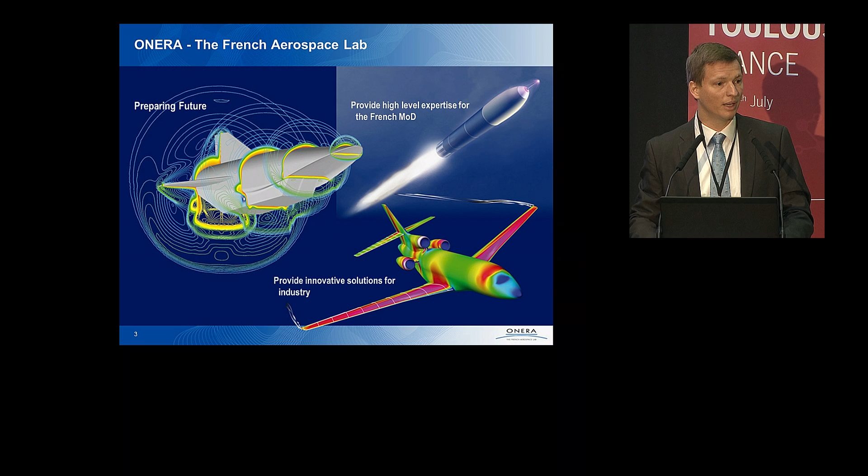So a very quick word about ONERA. ONERA is the French public research lab for the domains of aeronautics, space, and defense. Our mission is threefold: we want to prepare the future science and technologies, we have to innovate to the final benefit of the industry, and finally we have a mission to offer a high-level expertise for the French state.

This being said, let me dig into my topic today, cooperation for heterogeneous robots. I'm going to be somehow fast because I believe we are a little bit late, but I'm going to give you an overview of this topic, and I think my colleagues after me will build on other aspects of this very big topic. I'm going to first introduce this topic by mentioning some kinds of applications that you can find.

There are many of them, but I'm just going to give you a glimpse, and then give you ideas about some of the main technical challenges one is facing when dealing with actual cooperation between different kinds of robots. Since I believe you, the audience, are quite diverse in terms of knowledge with respect to the domain, I'm going to give you some glimpses or ideas about this. No equation in this. Okay.

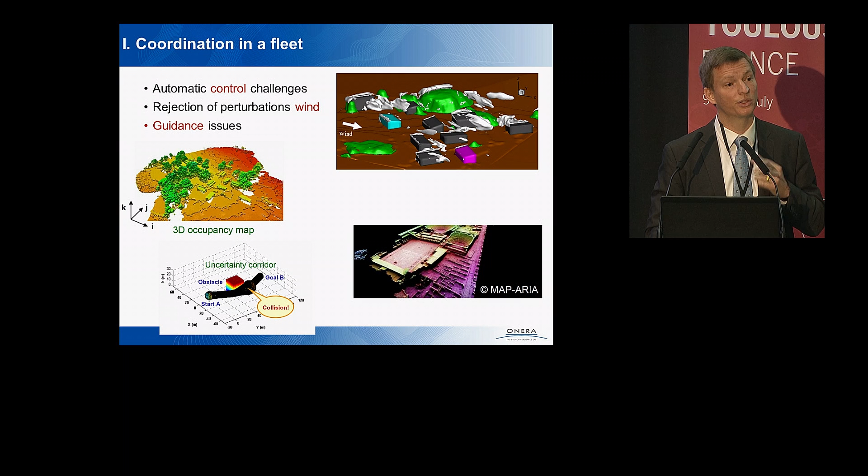But you want also to take into account some things like maybe the GPS localization will not be so good because I will be inside a building or next to a building. So we're able to say, when I reach this place, my localization will be less good, so I will take more safe margin with respect to this building because I know I will not be very accurate in my positioning there. So you have these kinds of issues.

Another issue when you want to do coordination, you want to have this fleet of, for instance, flying robots, flying all together. You have relative positioning issues. How do you know your position and how do you know the positions of the other robots in the fleet? Do they cooperate by sending you a position, and what is the accuracy of this position?

And then you have also other questions like how do you manage the shape of the formation? Do you want to have a master, one of the robots, which is a leader, and the others are slaves, they just follow it? But in this case, if the master has a problem, what do we do? How do we decide which one will become the next master and so on?

So for instance, an idea that my colleague had for that is to use a virtual leader, which is not an actual robot, but which is, let's say, the average of the position, and this one will be controlled, so that even if we lose any of the drones, there is no problem. The virtual leader still exists. And everybody is positioning itself with respect to this virtual leader.

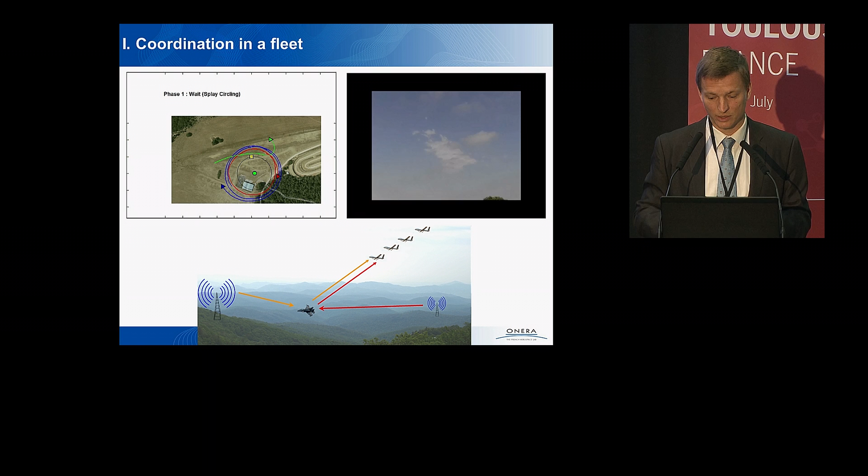So this is just a small video to show you an example of one of the applications we worked on. We are actually working on now, which is a cooperation of flying robots with spread radars to detect other flying objects. And this is a very challenging and very nice application case where you have all these drones flying all together to detect, by cooperating with each other, other flying traffic.

For instance, your UAV, your drone, does not have any more measurements of its speed. Are we able, by computations and by the help of other sensors, to recover this missing information? So we're working on that.

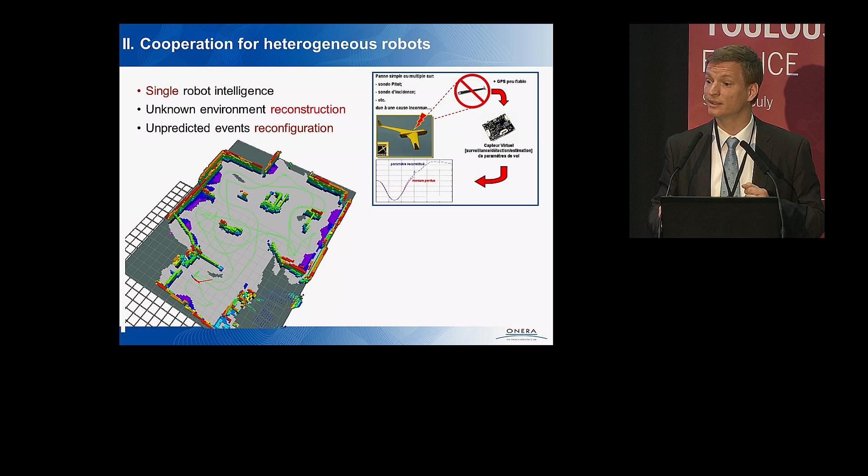Then the next step is the collective intelligence capability. This is a short video of an experiment we made with, I think, 8 robots, ground and flying, and we even introduced virtual robots. We had actual physical robots, ground and flying, but we had also virtual ones, which did not exist, but only in the computers. So we mixed real and virtual ones.

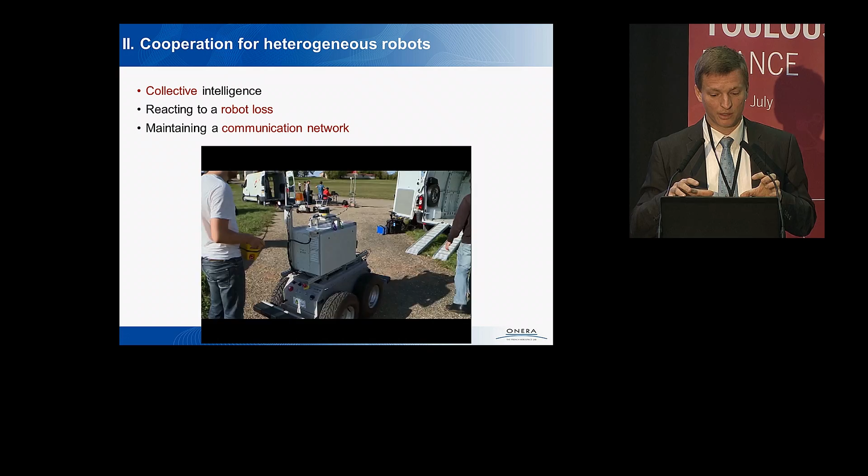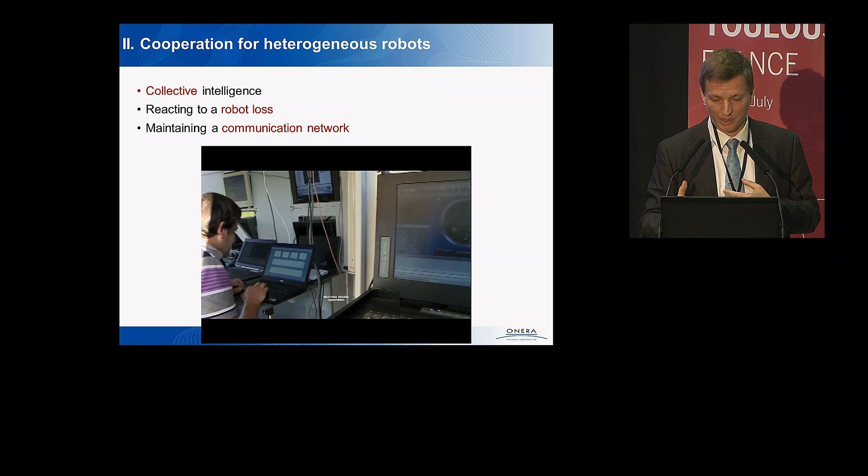And the important thing is we gave each of these robots first an individual intelligence capability, as I explained before, but then also a collective intelligence, algorithms, software, and capability. And each robot has the capability to define the mission for the whole fleet, based on what it knows about the positions and capabilities of each of the robots in the fleet, so that we are, in particular, able to face the loss of some of the robots.

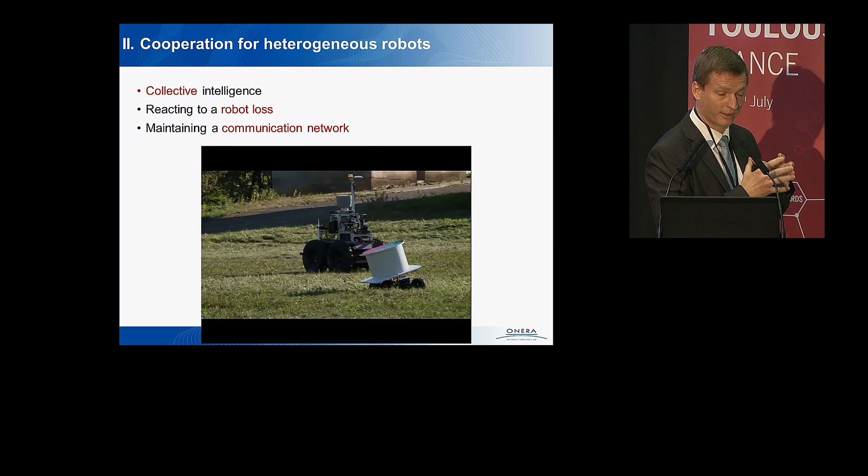So we simulated one of the drones being killed, and the rest of the fleet is able either to call for a spare, this is the easy way, or to reallocate the global mission objective into subtasks for each of the remaining robots. So we are able to face unpredicted events not only at the individual level, but also at the fleet level, and this is a very important task to do.

Another important thing is the communication between the different robots. If you are exploring a village, you may face communication problems between the different robots. So there are different ways to deal with that, and it's a big and complex problem. But one thing is you can add to the collective goal of the fleet an objective to maintain the communication network between them.

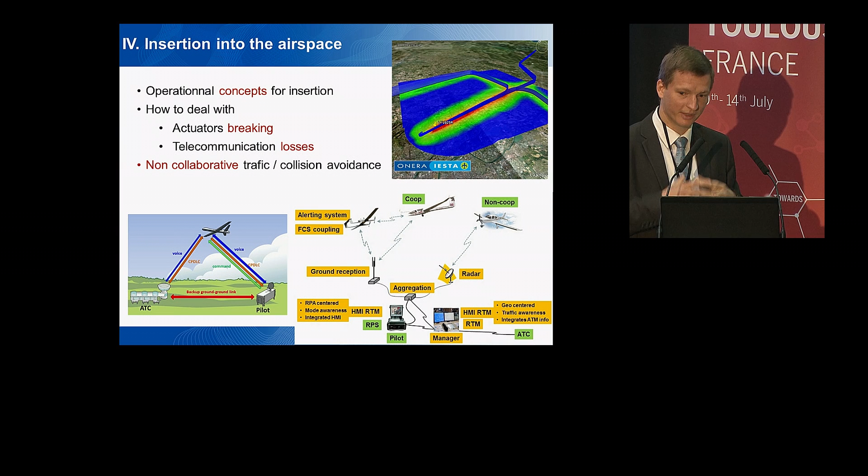Another topic dealing with flying robots is, as I mentioned briefly before, the insertion into the airspace. You have so many flying things today in the air, and with the multiplication of drones, you may have much more. So we need to make new operational concepts to insert them inside this airspace and to take care of issues like actuator breaking. I was talking about that before. When a drone is facing a problem, you want, for instance, to make a bubble around it and to forbid any other aircraft from getting inside this bubble.

But then you want to see if this operational concept is possible. Meaning, if you have so many aircraft in the air, is it possible to save a bubble and say nobody flies in there? Is it doable in terms of the size of the traffic? So this is a kind of question that needs to be asked.

Finally, also a very important topic that I believe my colleagues will dig into much more, the human-machine interaction. And I want to share only one thing with you about that, the supervision by one human being of an autonomous system. You know that the human brain is fantastic, of course. It has a lot of capabilities, but it also has some particular flaws that we need to know and understand so as to design very dedicated and efficient interfaces between the human and the robots.

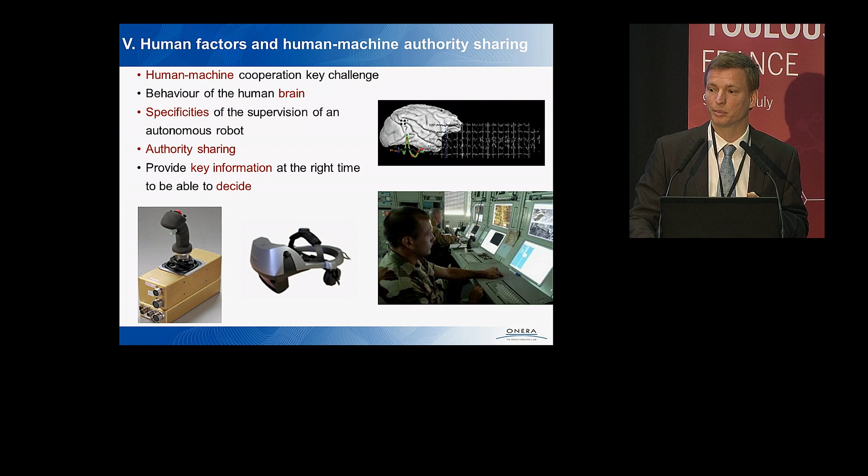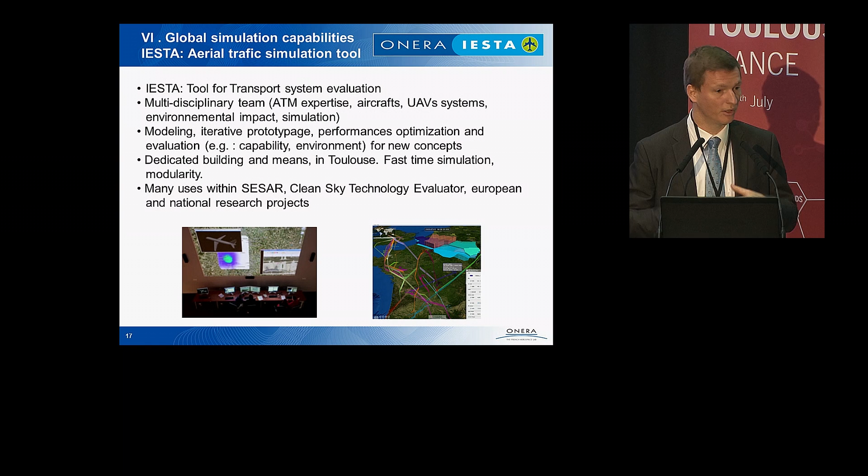And finally, when dealing with all these aspects related to cooperation between different kinds of robots, you always need very efficient simulation capabilities. Of course, everybody is doing simulation, but here I'm talking about very refined simulation capabilities where you are able to model very accurately the sensors, the response of the environment, and the behavior of the different dynamic vehicles. You also need capabilities to model the air traffic, to have a good idea of the aircraft and drones in the air, and to see if your operational concepts are efficient or not.

And with this, I am done. If you have some questions, I will be happy to answer. Many colleagues at ONERA are involved in this kind of work. Thank you very much.

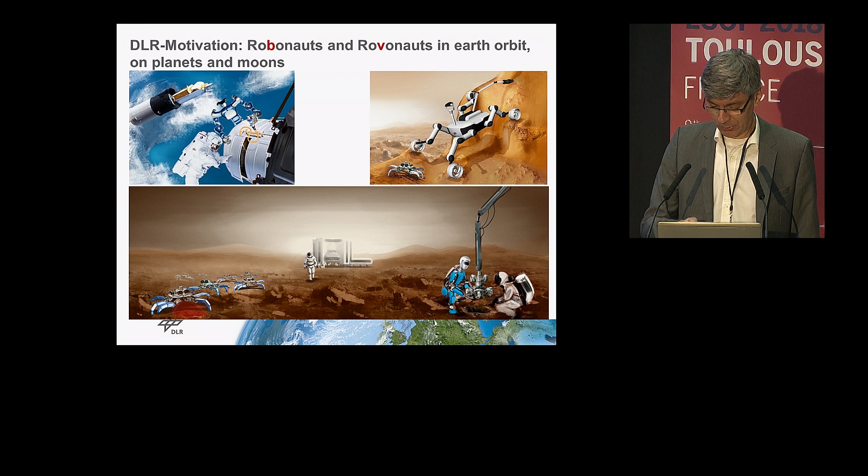Of course, the expectation of most people related to robotics is determined by science fiction movies. I like to show this movie, I, Robot, because the people who made it did very good research about the capabilities of robots and the state of the art of robotics. So what would we expect from a robot which works together with us?

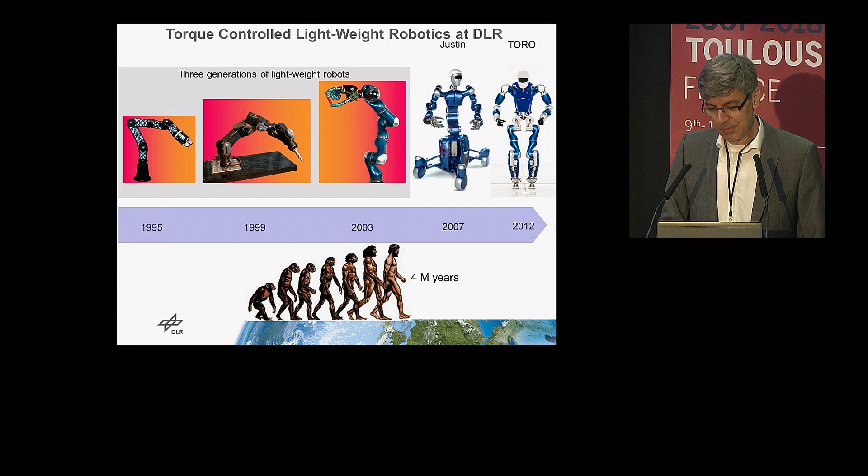Those robots are modular - you can put them together using the same modules and build up more and more complex humanoids. Now the focus is more and more on behavior. Of course it's pretty slow progress compared to the expectations of science fiction movies, but still, compared to human evolution, maybe we are fast, depending on how you assess our results.

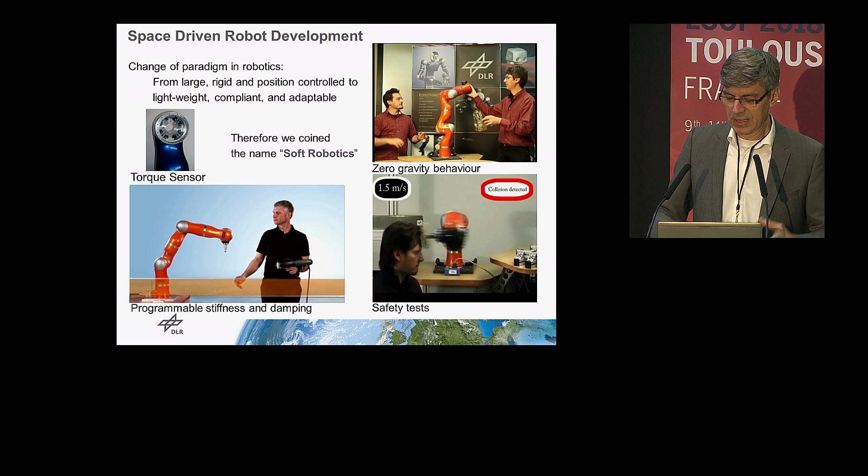Anyway, what do we mean by soft robotics? We've seen classically that robots are programmed to follow trajectories - this is how robots in industry and manufacturing work today. But it's not the way humans work. If we want to grab an object, we don't say I move 30 centimeters from my base, 30.2, with 50 micrometer precision. What humans do is use vision, the sense of touch, force sensing - touch the table, slide along it until they encounter the object, and grasp.

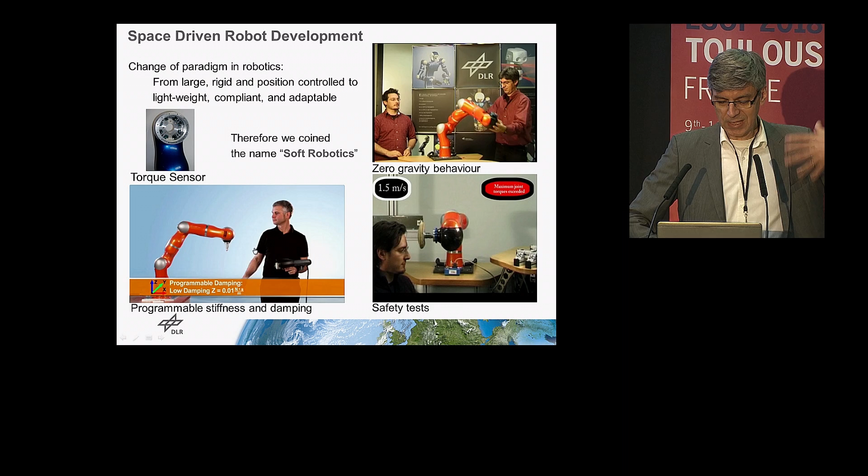So it's everything sensor-based, and this is what we try to reproduce there. The robots can program the stiffness, have some sensitivity in their joints, and most important of all, by having this kind of sensors, you can prove that they are safe.

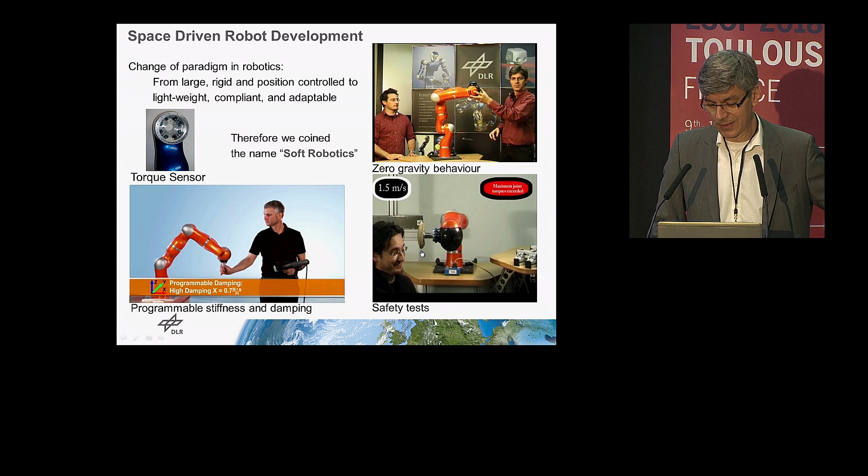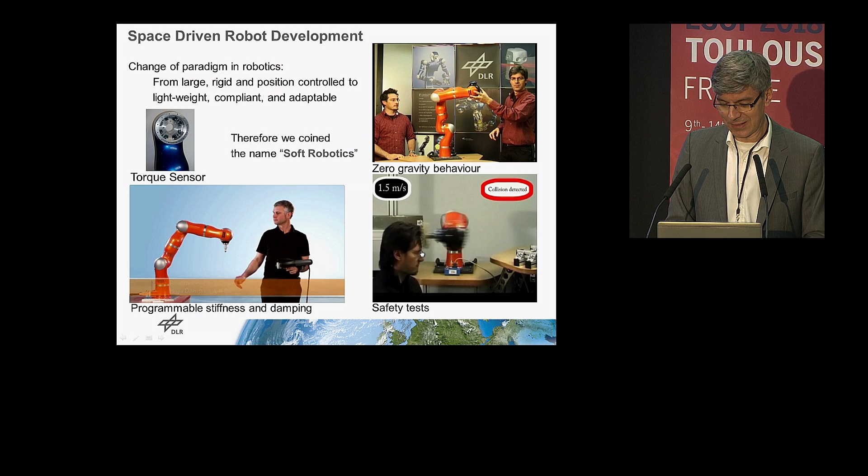This is a master and later on PhD student of mine who was the first to do this kind of experiments, just to show that robots are indeed safe, that you can detect the collisions. He's a professor now, so he didn't get any damage.

How can we imagine controlling those robots in a different way than moving each joint one by one on trajectories?

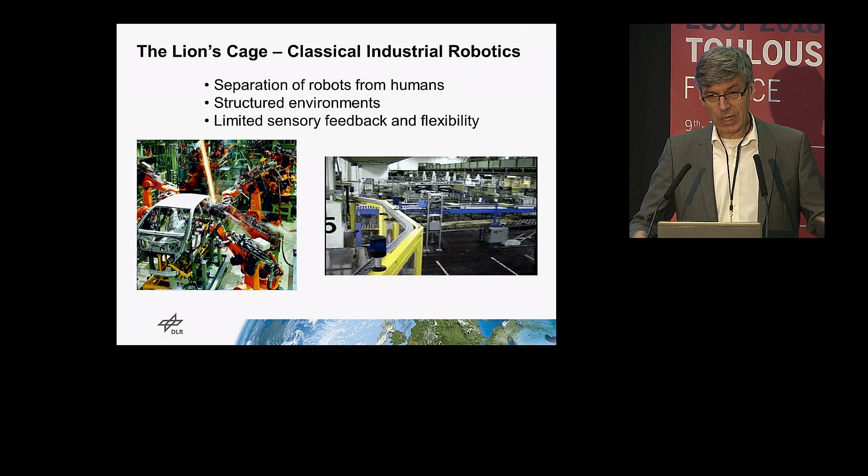This is very in contrast to what I mentioned before, industrial robotics. If you go to any car manufacturer here in France, probably Peugeot or Renault, that's the way they produce carrosseries today. There's no human in there because the robots are very big, very fast, but also very dangerous. What we are looking at is a new type of robotics where the robots interact with the humans.

But when we designed those lightweight robots, of course the first thing was to certify them. So when we licensed the technology, we were asked, can you prove that the robot cannot hurt the human? You know about Asimov's laws, and the first law is the robot should not hurt the human under any circumstances. Can we guarantee that in a systematic way? The car industry does testing.

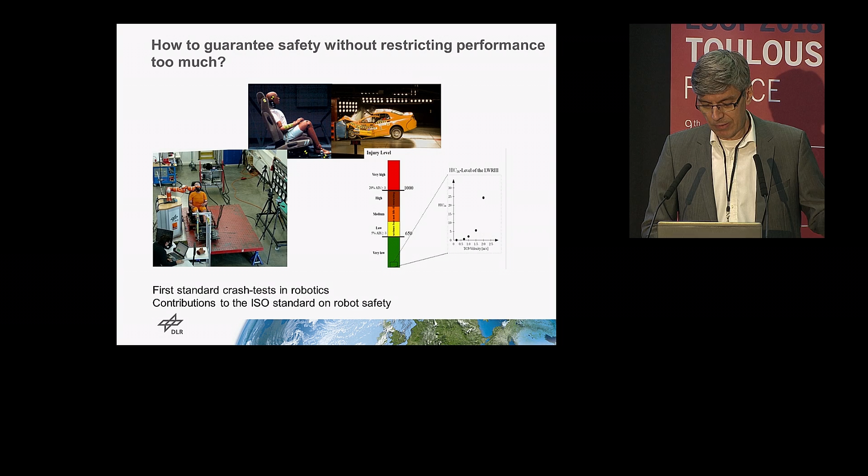We were the first to start doing this kind of tests with crash test dummies, and it took like 5-6 years until we developed our understanding about what could really happen, because there are many ways a robot can hurt a human.

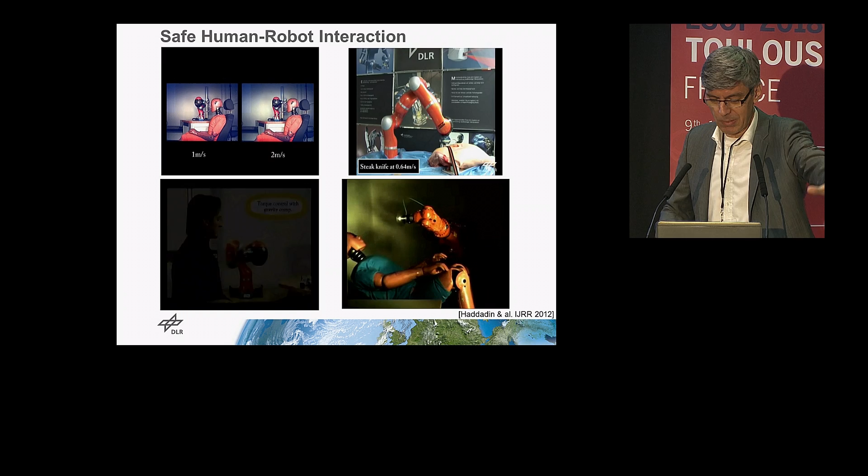He can also have a sharp tool in his hand. He can block him at a wall. He can crush, hit, whatever, if the software fails. So we rely on those sensors, some very different kinds of sensors, and after years and years, I think we have a very clear methodology for how you can assess and certify a robot to be safe for interaction with humans.

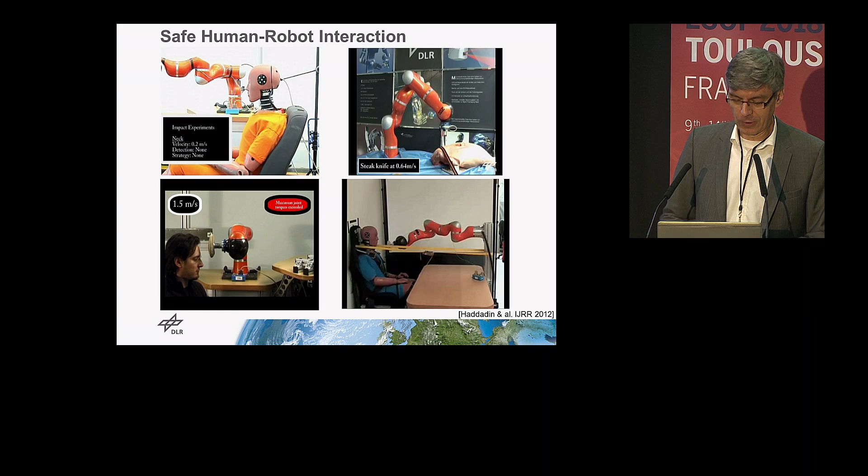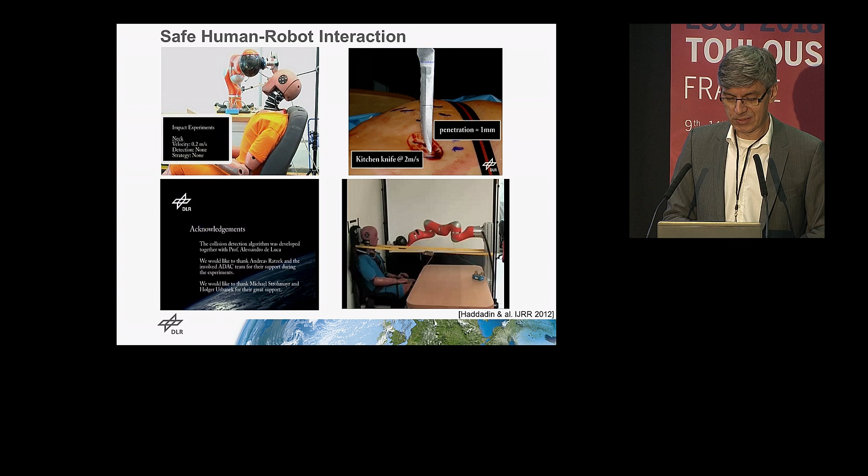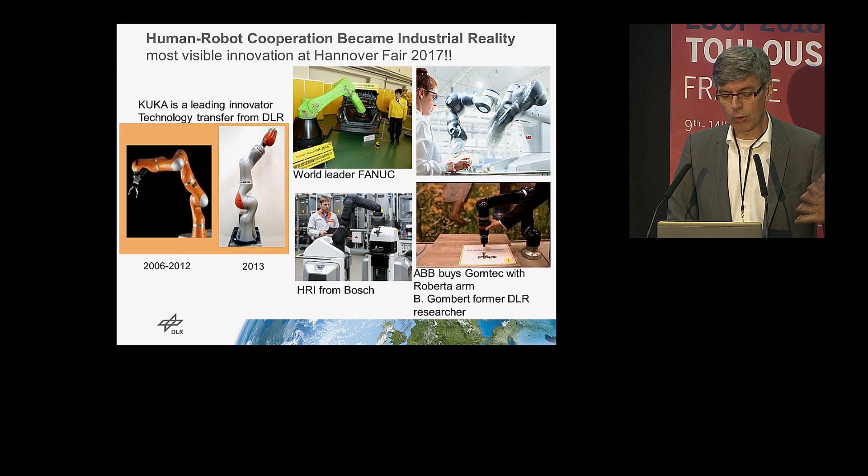This also changed the regulations. Like 10 years ago, the industrial regulations prohibited shared space between humans and robots. What happened now is that after the regulations have changed, and there are manufacturers which sell these robots for interaction, all big robot manufacturers, if you go to Hannover Fair for example in Germany, which was just 3 weeks ago, the main topic was human-robot collaboration, the main topic for automatization.

So not anymore the big, very fast, precise robots, but robots which interact with the human such that you can combine the intelligence, the flexibility of humans with the productivity of robots.

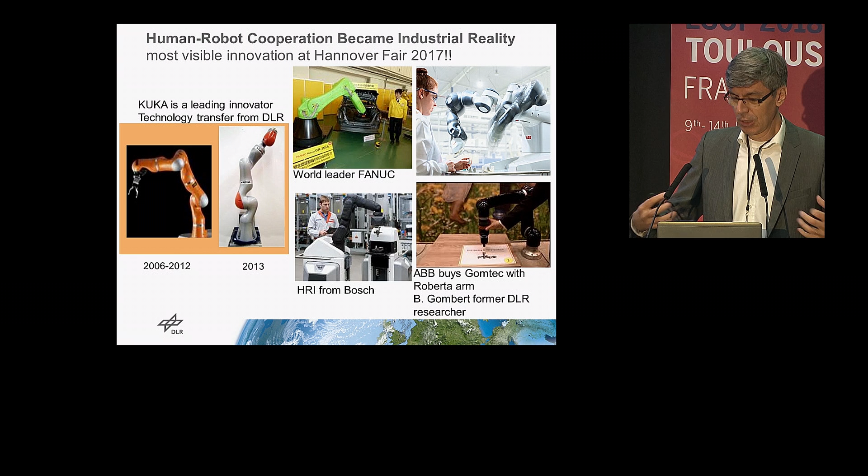These robots still tended to be very expensive, about 90,000 euros. Now we have a spin-off company of exactly the PhD student I have shown before, who tries to sell those for 10,000 euros. He also tries to develop app concepts. By the way, he demonstrated at the fair an application where those robots build other robots - at least in part, they do the assembly.

So that's how he looks now, some years later, as a professor. And if this comes through, then I think we'll have a breakthrough in making robotics affordable also for small enterprises, also for small lot sizes, because the programming becomes much easier.

Okay, coming to the programming. Programming for interaction becomes much more difficult than standard programming because you always have a human in the loop. So you need to detect the human, and the robot needs to react to the human accordingly. The human should be able to stop it at every time.

We develop different ways of interaction: image processing, but also gestures. You can just touch the hand of the robot, and the robot will stop.

You can always go and stop the robot. If you pull harder, it will just float away. Then you can fix what you have to fix. Then you have another set of gestures to open the gripper, to close the gripper, then you confirm.

The robot will continue. But designing this interaction is very difficult, and I think the big success of the smartphone is not because it's a great phone, but because it's such a great interface, because anyone can understand it within 20 minutes, and it's a pleasure to work with.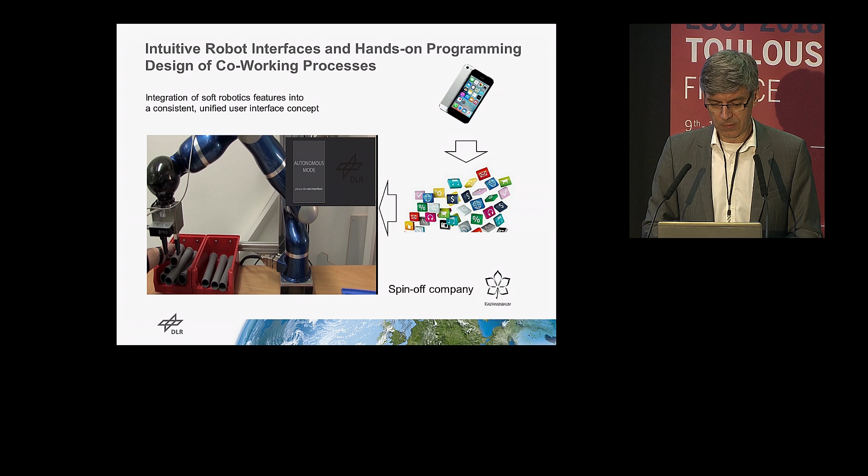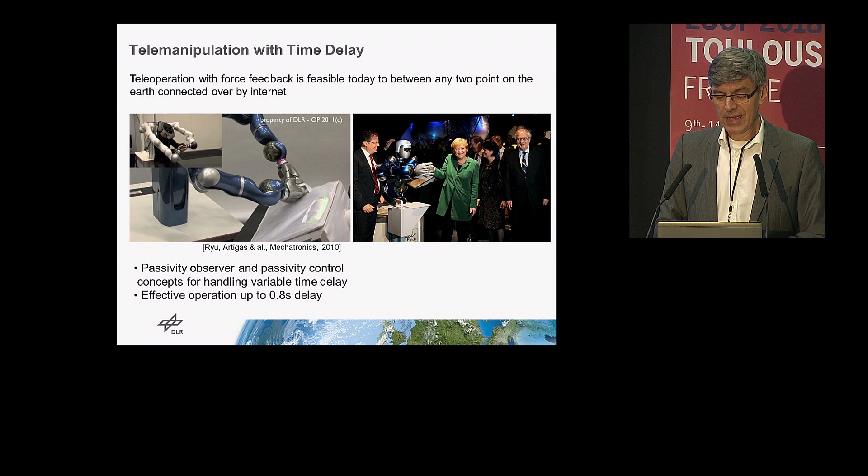Now I would like to talk about another topic you can do with interactive robots. In cases where tasks are very complex and the level of intelligence is not yet high enough, there is teleoperation. It's another way of interaction between robots and humans - having a robotic avatar, if you want.

You have the operator here, and he can stay anywhere in the world as soon as you have a teleoperation internet connection of about 100 to 200 milliseconds delay. He can see what the robot sees in 3D because the robot has stereo cameras, and he commands the robot using input arms. Not only is the position commanded to the robot, but when the robot touches something, it has force sensors, so the person can feel the interaction forces - a level of immersivity where he feels like being inside that avatar.

Of course, we know the movie Avatar, where everything is done by the brain interface. Our starting point was these robotic arm interfaces, and we use that in different applications. You can use it for maintenance or repair in dangerous areas like Fukushima or earthquake areas, and so on. We started in space applications.

Our motivation is that the first thing which will happen when the first mission goes to Mars is that the astronauts will stay in orbit, will not land yet, because if you land you also need to land a rocket to bring them back. The technology is not yet there. So probably the first mission, as it was in the 60s with the moon, will be that astronauts will orbit

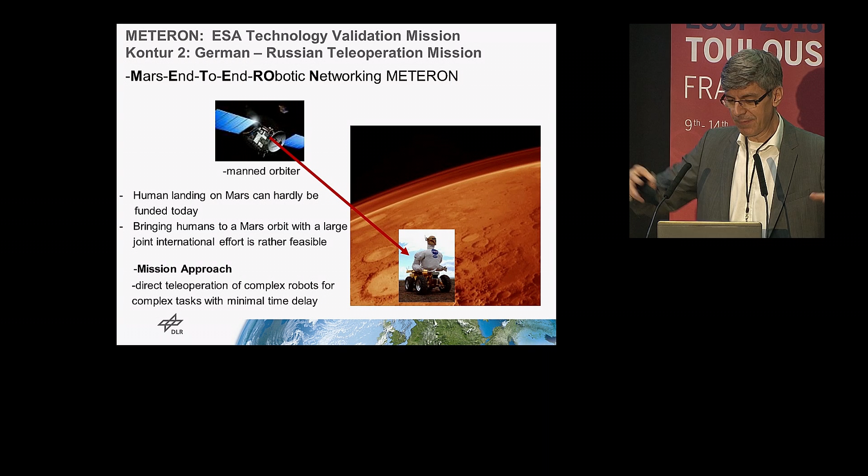Mars and place robots at different locations, then teleoperate them like having avatars on the surface of Mars. We try to develop this technology with many partners - European Space Agency (ESA), NASA, Russian partners - and experiment with them on the International Space Station. So playing out that scenario, Earth instead of Mars, and the space station as an orbital spacecraft.

I will show some experiments we've done over the last years. We tested different interfaces: exoskeletons you can carry around - this is a work of ESA - input joysticks where you can have force feedback, or even simple interfaces like a tablet PC. These were the first experiments we did with Russian colleagues using this force feedback joystick.

This is Oleg Kononenko, and he controlled from the ISS robots which were placed on the ground. They had a lot of tasks to experiment how telepresence and force feedback feels in space.

Then at the end, we did a public outreach demonstration, which was also on German TV, where we had the astronaut on the ISS, again feeling the forces of interaction, and we had our humanoid robot on the ground. You not only could hear and see the astronaut, but you could also feel and shake hands. He could do some tasks.

Then he met his wife and his son - they came and said hello to him. I mean, he's there for half a year, up to a year. And then he even manipulated some objects, like this ball, and he did it jointly - some people manipulated one arm from St. Petersburg in Russia, the other arm was manipulated by the astronaut, and they jointly performed some tasks.

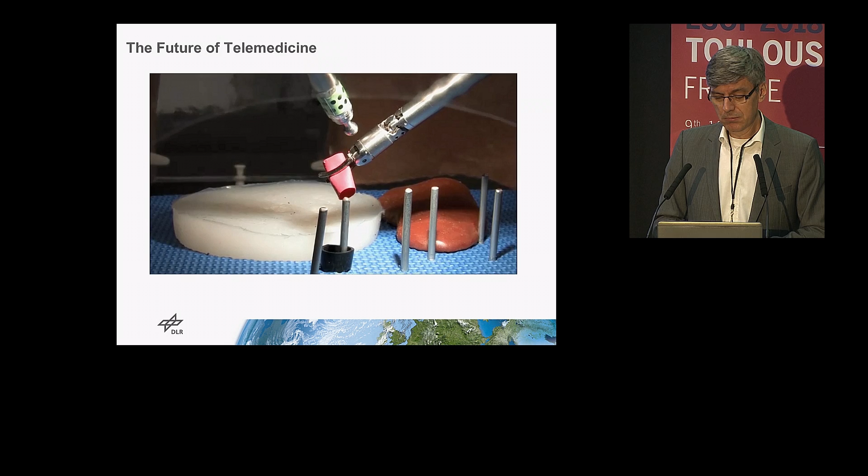The same concept of teleoperation and interaction with a remote robot, we applied to surgical robots. There's actually only one manufacturer which sells surgical robots today, but in the US, 80% of prostate cancer surgery is done by robotic systems. Why? Because the surgeon still operates, but he can do the motions in big scale, and the robot will do it in small scale. We did the next step of teleoperation, so we have a robot doing the operation.

Now you don't need to be scared and worried. This is just a joke movie which our co-workers did for our Christmas party. What in reality happens is that we have a teleoperator here.

He operates the robot, and the robot plays the role of the surgeon and operates on the remote side. This is just to show that you have like 150 motors here inside. You have twice propagating a stereo image, twice propagating the forces, and the system still works. So teleoperation is something which works really well. But yes, be assured, in reality you will have a surgeon here and not a robot. This is just a Christmas movie from some years ago already.

Anyways, what's next? How does it continue? We have seen these robot arms as interfaces. Now people are looking more and more into natural interfaces about measuring currents of muscles and nerves. And of course, the electronics is still quite complex and bulky.

Now we get rid of these cables. So I think in 2 or 3 weeks I will get a video without the cables. But those natural interfaces use these telemanipulation concepts to either teleoperate robots by just contracting your own muscles, or operate prosthetic devices. So this is a PhD, or a postdoc actually. He's a healthy person, but he demonstrates how he can operate a prosthetic hand.

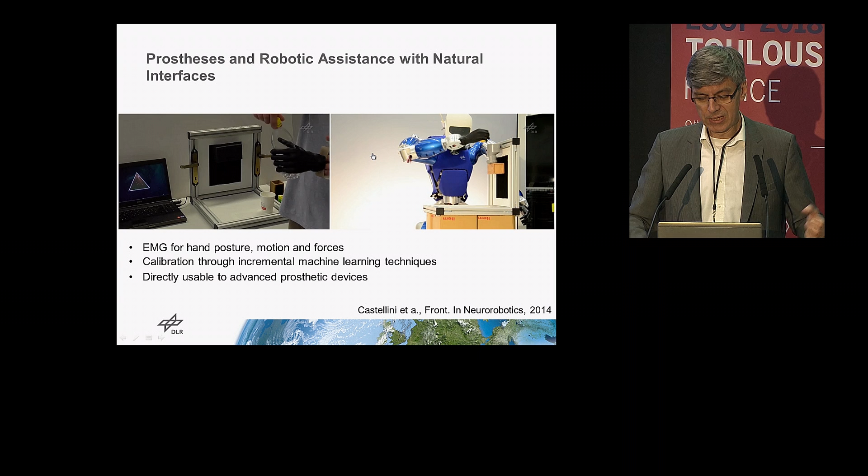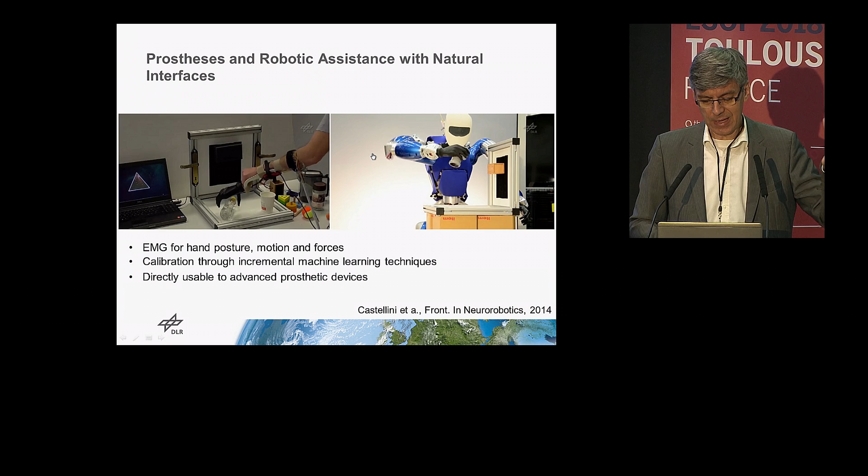And we have a lot of tests, currently we have 2 patients. One is coming from Iraq, he's an Iraqi amputee, and one is a German person which by birth has degeneration, so he has no hands. And we test how many of the activities of daily life they can perform using this prosthetic hand and a very natural interface. The difference is today's prosthetics just have 2 fingers and they can open and close, while these new devices have 5 fingers, and they can also control the forces of those fingers.

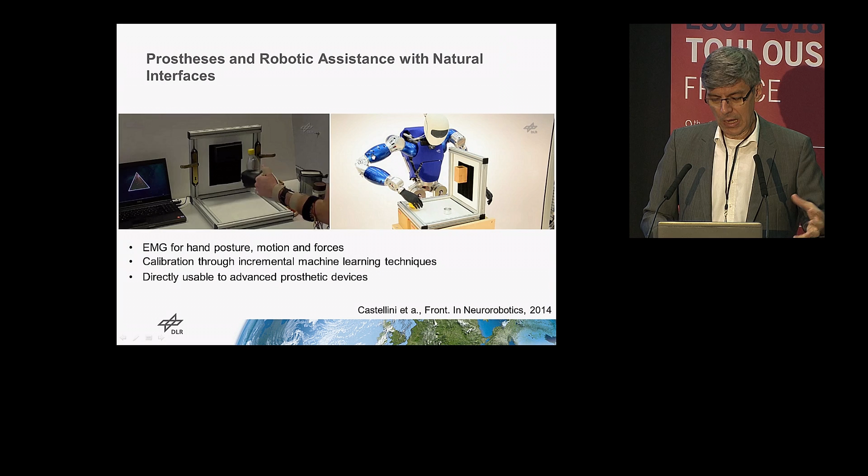And this person, she's a paralyzed person. She was paralyzed for 15 years, but she had this brain implant in the motor cortex. And when she imagines that she would like to move her arm, the signals are still in the brain. So if you have electrodes which record those signals, and then you use machine learning techniques to transform those signals into robot motion. We were addressed by the Americans because of this safe, compliant, reliable robot. Then you can transmit those signals to the robot, and she was for the first time able to grasp a bottle, bring the bottle to her mouth and drink.

So she can really move only her head, right? And this was great. Still is preliminary. Still there is our PhD student in the back paying attention that nothing bad happens, right? He has a big red button where he needs to press if something goes wrong. But it shows that this is feasible.

In Europe, these brain interfaces are not allowed. So what we are doing is using these electromyographic interfaces to apply the same technology to patients which are not paralyzed but have some degenerative disease. So the kind of disease Stephen Hawking has, which is a degeneration of the nerves, and after a while the muscles cannot be activated.

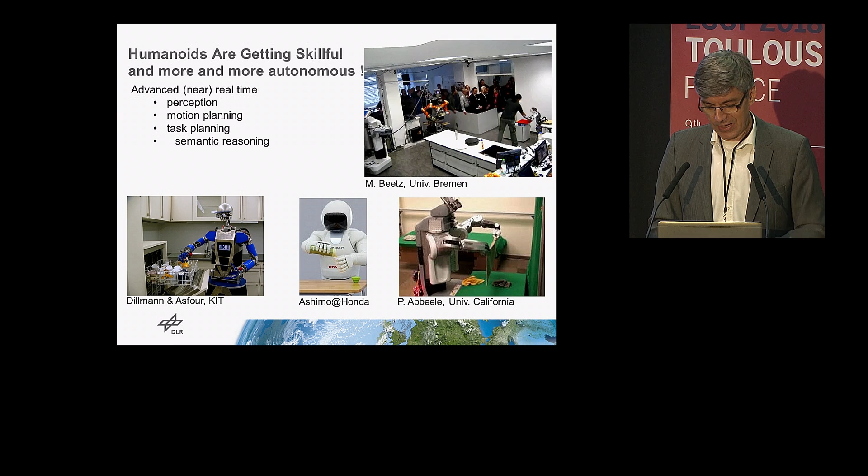Then, of course, what people expect, as we have seen in the video, is autonomy, right? We would like to have robots which do the household, the kind of task nobody really likes to do at home, like cleaning the dishes or emptying the dishwasher and so on. There are many, many activities worldwide. I gave some examples from each continent.

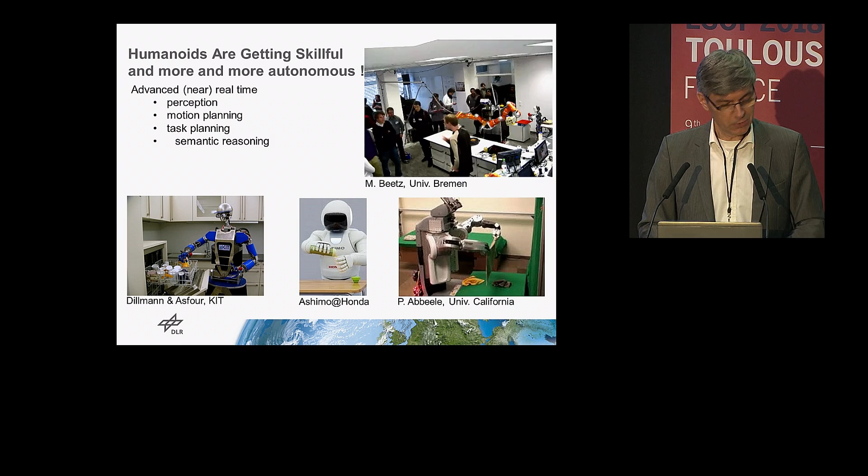Rachid Alami is doing a lot of research here in Toulouse, and we cooperated on several European projects. What's the state of the art today? It's not exactly like the video at the beginning, but this is what we are doing at DLR.

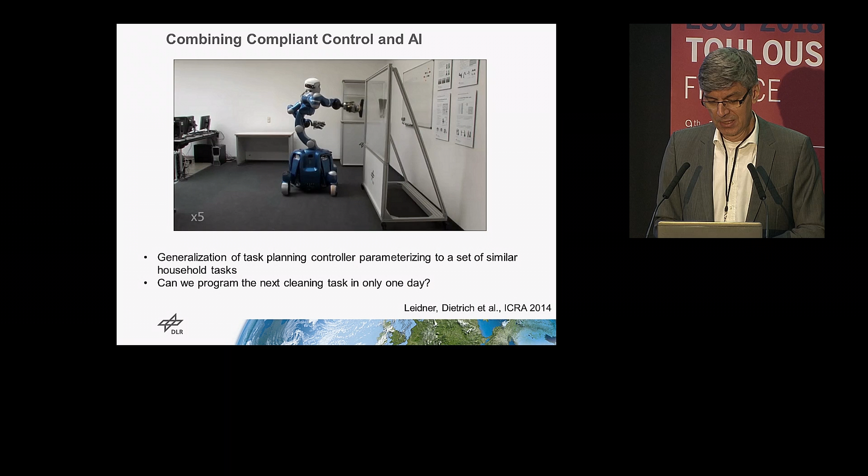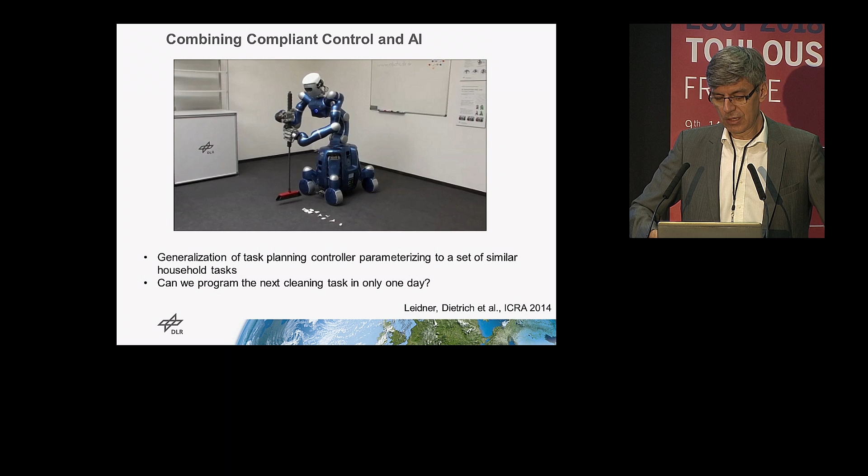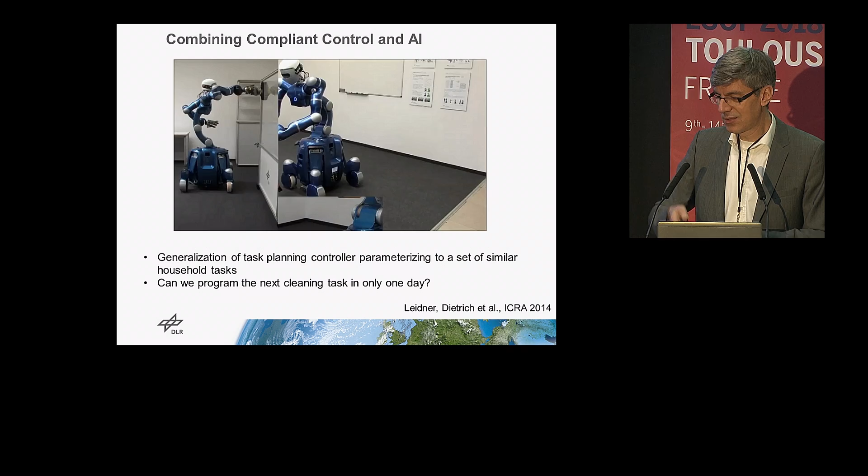We had a PhD student look at cleaning tasks. The question is, how can you program a quite large category of activities? In cleaning tasks, you always have a tool, a medium like a fluid or liquid, or even broken shards, and you need to do some interaction with force and compliance in order to fulfill your task. The problem is you have so many tasks in the household that you cannot just go one by one and program each one in Java or C++. You need some other approach.

So what we are trying to address is, if you have a family of tasks and examples for many of them programmed by hand by humans, can you generalize using machine learning techniques such that the next task becomes easier to program? Like 10 years ago, for such an application, we needed 2 PhD students for half a year. Now we need 2 PhD students for 3 days. Still it's long, but we are progressing.

The goal would be that you have direct speech interaction, and you just tell the robot go, and you make an introduction in your kitchen. Here I want to put the dishes, here I want to put the knives, and then the robot will do that. Still quite far away, but things are progressing.

I won't go into the details, but it's about interaction. Of course, you have the robot, then you have the control, and then you have a lot of AI, image processing, planning. You need to recognize objects, you need to do symbolic reasoning - in order to open the door, then grasp the object, then bring the object to the table and so on, the planning on a semantic level. Then you have to plan each individual motion of all the joints, so still quite a complex task.

I will give now another example. I'm jumping back and forth between space applications and terrestrial use, because this level of high autonomy we've seen here is probably not feasible to achieve in the next 5, maybe even 10 years in real household applications. But what works fine is an intermediate level of autonomy where the robot has a lot of skills, but you still have a human telling it step by step and having the possibility to interfere. Again, we started with a space application, and then we want to transfer that to terrestrial applications as well.

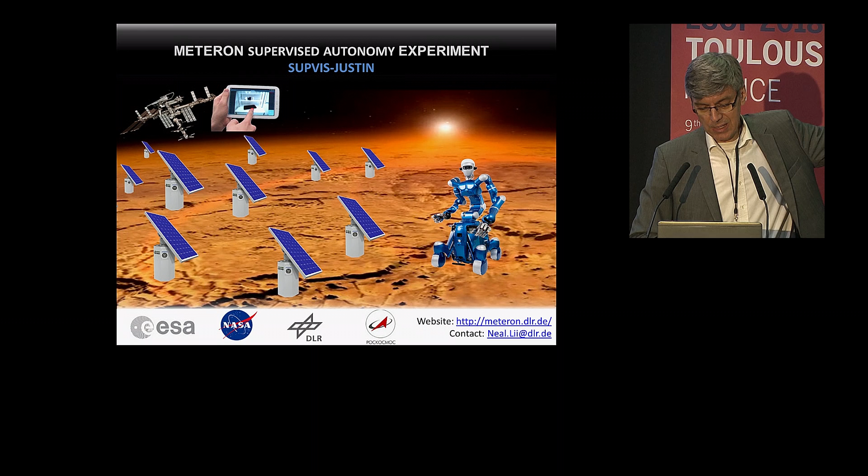Here again, I came back to this scenario of commanding robots on Mars, and we asked the astronauts, can you steer the robots just by a tablet PC? And the task was maintaining a solar station on Mars. Again, we'll do a set of experiments with astronauts. We are just training Paolo Nespoli, an Italian astronaut who will fly in July to the ISS, and we have some others. And what's the scenario?

So the robot can plug the connector, the user just has to say, grasp the connector, plug it to station 3, then the robot will do that. And this is the level of combined autonomy and control we would like to test.

I won't go into the details about this experiment, but what's interesting is that after we developed this interface, we started thinking, where could you use those methods on Earth as well? Hopefully at the 1st of June, we start the Bavarian... sorry, there are some German slides which just slipped in.

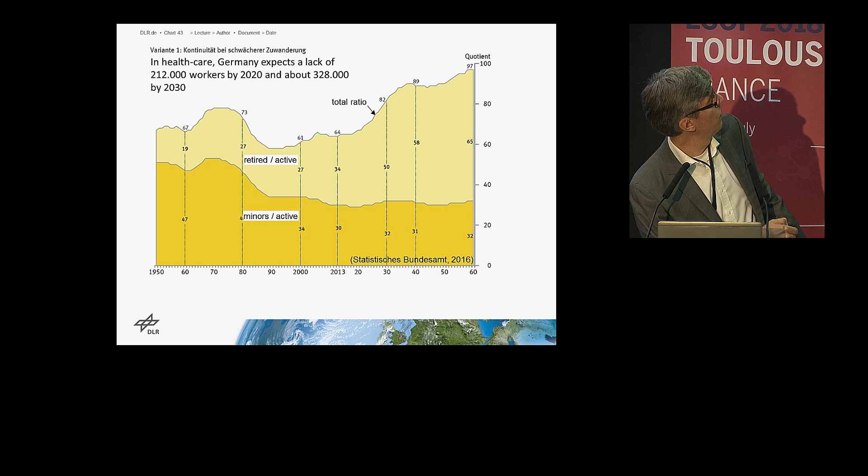So I think we will need that. We have a serious problem. I don't know the numbers from France, but I guess they are similar, maybe not that bad, but similar to Germany. And this is the structure of the population: elderly people growing, not so many young people coming up. So I think we need this technology.

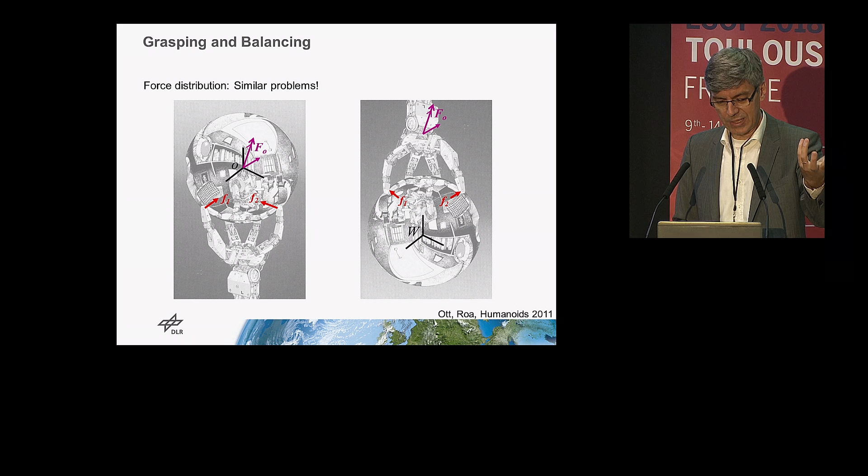I will probably finish now with humanoid robots, and we are looking also into walking robots and trying to apply this interaction. It's very similar. Grasping and walking are similar problems: in one case you manipulate an object, in the other case you manipulate the ground.

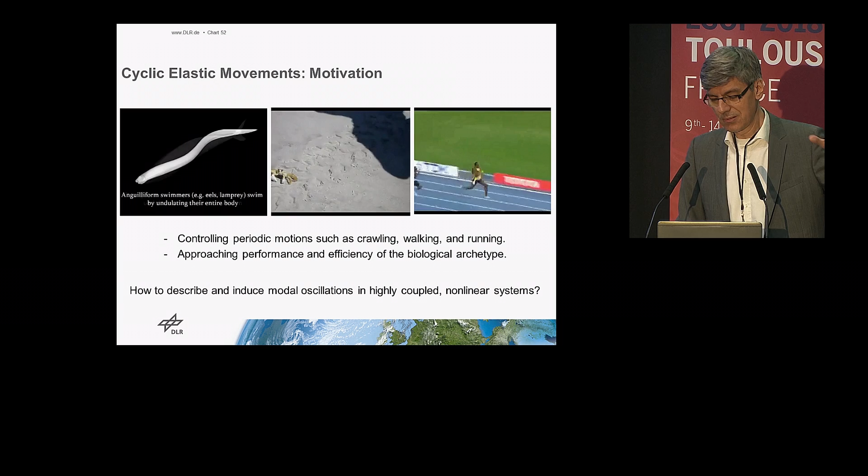And maybe I will try to finish. The last part was about how you can mimic better the biomechanics by storing energy in the body and being more efficient. But I think I will step over those videos and maybe show only at the beginning the last type of research we are looking at, and this is efficient locomotion. How can you store energy to run in a similar efficient way as humans?

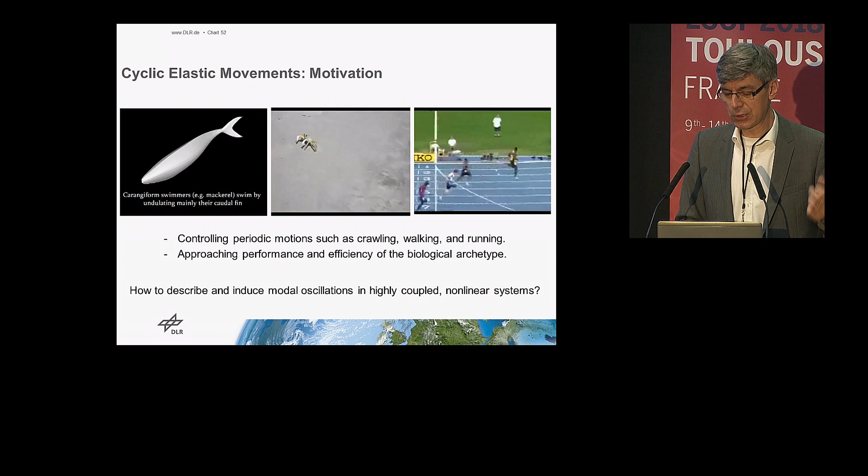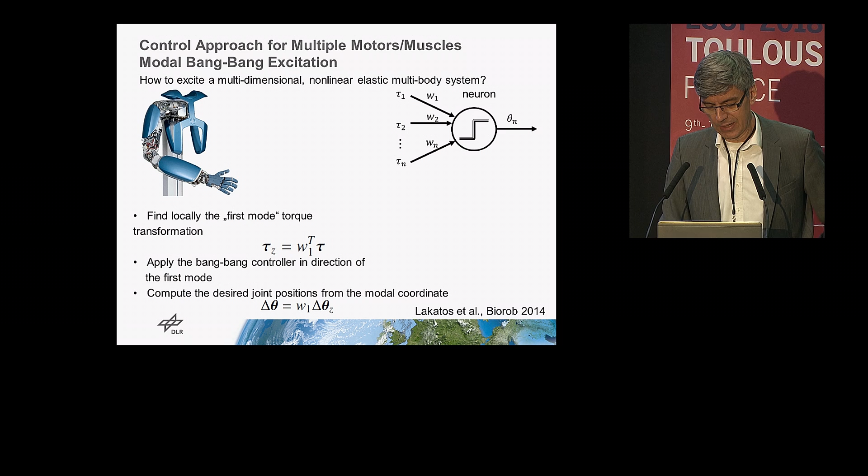And here we took very strong inspiration for the control from biology. So we found out that with robotic tools, you come up with control structures that, for those a little familiar with neuroscience, very much resemble neurons, actually. So it seems that neurons are really well suited to control motion, right? And the optimal motion control in robotics, for exploiting elasticity, also has a neuron-like structure.

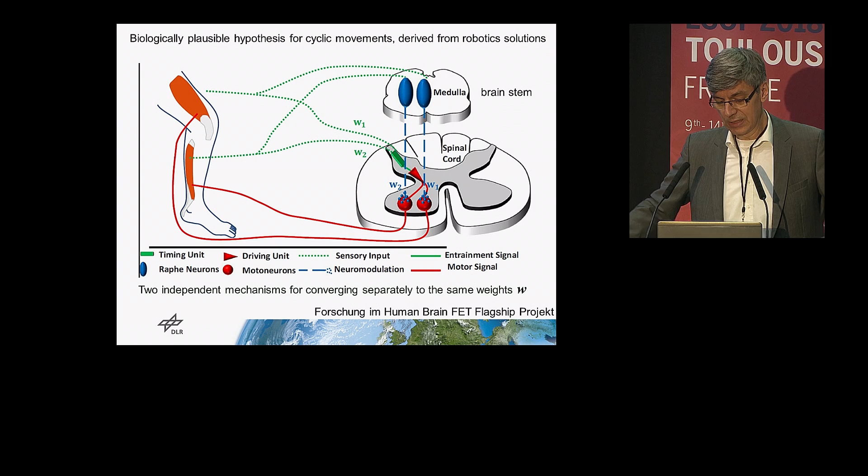And this closes the loop I wanted to tell about, because now we are trying to provide hypotheses to neuroscience people about how the locomotion loops in the spinal cord can occur. And we have now a hypothesis which we published and try to validate, explaining with robotic technologies how the spinal cord and the brain stem generate motion.

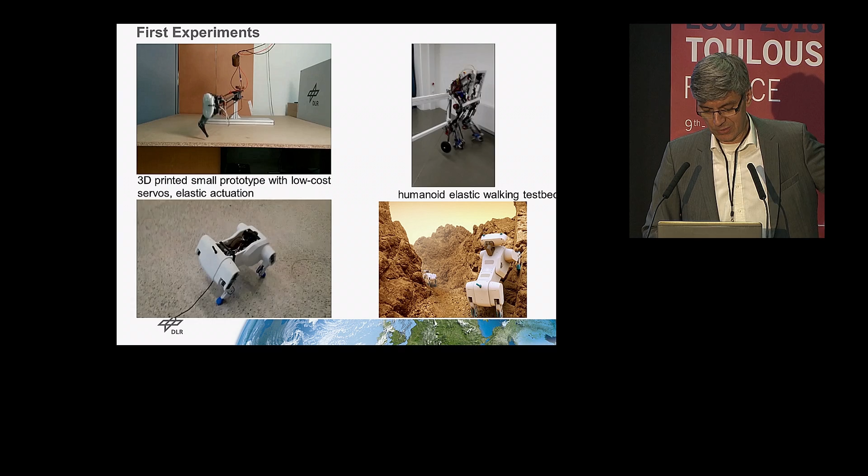This is just to show that indeed these concepts work also for real robots, for hopping robots, for elastic robots. You see this is walking, so also different locomotion modes. This is now trotting, if you look at the robot down here, and then we will have something like galloping, and these are based on neurally inspired locomotion patterns.

And this brings me to the end of the presentation. I wanted to say that we started by looking at humans, taking inspiration to build robots which help in everyday life, but also help understanding ourselves, how motion emerges, how intelligence emerges. And we ended by also giving something back to biomechanics and neuroscience, by providing new hypotheses and new tools for doing experiments. I think this is what makes robotics research so exciting. Thank you very much for your attention.

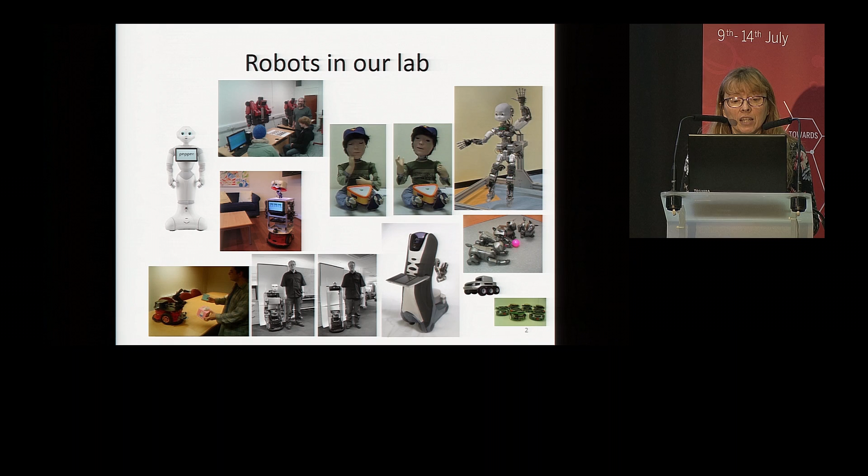And we work with a big variety of different systems because depending on the particular type of experiments you want to do or the application areas, you need different types of systems. So for example, some of our work, and that relates also a lot to the previous speakers, is about autonomous robots. This is what I call a robot-centered view, where you look at the system, its autonomy, and you want to make it able to carry out certain tasks on its own without human intervention, or even in a group of robots.

Some other work is more human-centered. We are looking at application areas where in therapy or education, we need to find out first what are the requirements, what are the things and ways in which the robots could help. And finally, there's a lot of research that we and many others are doing on robot cognition, cognitive robots, robots with intelligence. Now, in reality, the most interesting work takes place right at the intersection, where you need to look at all three of these aspects.

You need to look at the robot as a system that can perform tasks. You need to look at the people it is interacting with, and how do you design these robots for people. And you need to look at the levels of cognition or intelligence that the system should have.

Now, one concept that we have been using a lot in the past, say 15 years, is this companion paradigm. And what we mean by a robot companion is a robot that makes itself useful. So it needs to have certain tasks. It is not just there for entertainment purposes or looking cute. It needs to have certain tasks, certain jobs to do, but it carries them out in a way that is socially acceptable.

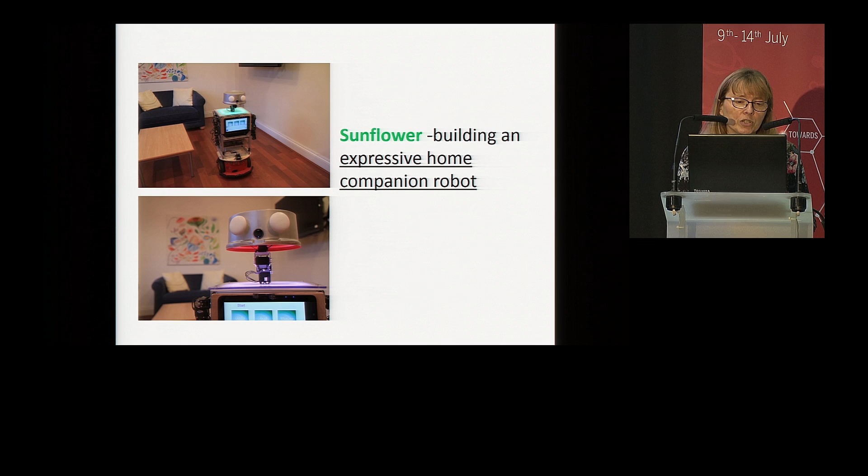We built this humanoid robot, Kaspar, specifically for children with autism, in order to use the robot in robot-assisted therapy. But also in terms of a home companion, we designed a robot, an autonomous mobile robot, for home assistance scenarios. I will later give some examples of that.

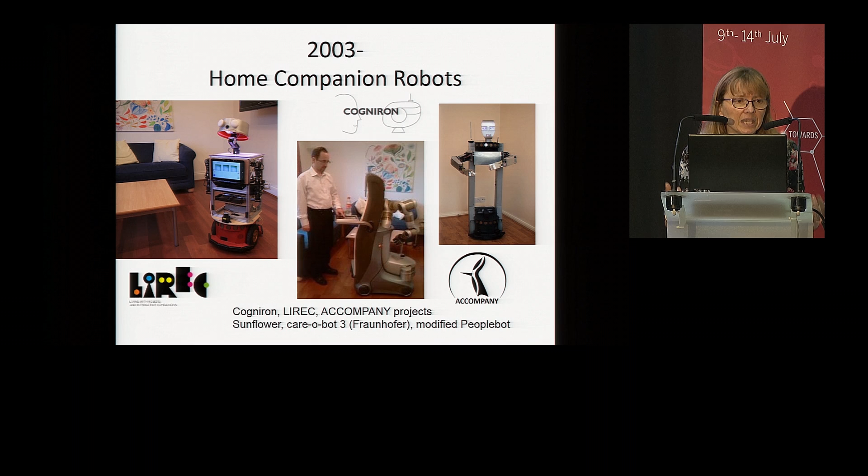We started this work on home companion robots already back in 2003, and then later also in collaboration with Rachid Alami in the Cogniron project. The background for home companion robots is this massive demographic change in many countries. So the idea is not to replace people, to replace human carers who come in maybe twice a day. The idea is to have systems, like a smart home system with robots integrated, that can be there 24/7, looking after people, identifying problems, seeking help, and also providing direct assistance.

One setting that we use very often is the University of Hertfordshire Robot House, because what we realized when we started back in 2004 is that when we do laboratory experiments and say to participants, imagine you are in your own home and there's a robot assisting you, they didn't really buy into this idea, because after all they were in a laboratory. So we first rented an apartment, a ground floor apartment where we carried out experiments, but then both the robots and the experiment became too large, and we bought a normal British house in a residential neighborhood, not on campus, and transformed it into a smart home, with various types of sensors but also robots.

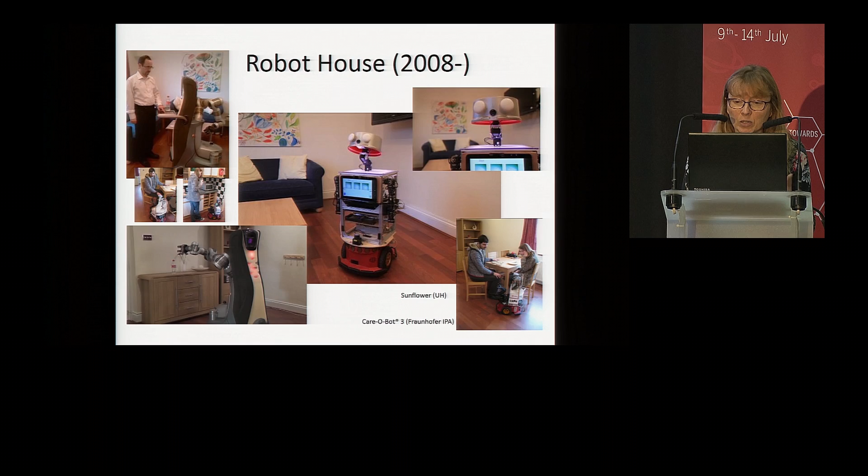So the type of assistance that we study includes using the robot as a cognitive prosthetic, as a memory aid, reminding the user of doctor's appointments, reminding the person to take medicine, reminding the person to have a drink. If the robot notices that this person hasn't had any water to drink for a few hours, then it might make a recommendation, or having food.

There's also physical assistance. Sometimes you have older people who live in their homes and still can do many, many things, but they may have developed physical problems. They might use a walking stick or a Zimmer frame, so they have problems carrying objects around. And that's where this physical assistant comes in, where the robot could fetch and carry objects.

And finally, social assistance. You can have the robot, for example, trying to inform the older person about community events in the neighborhood, or maybe, when it's the daughter's birthday, send a message or do a Skype call. So these are the types of assistance that these home companions can provide, and the idea is to delay the moment when people need to leave their own homes and be admitted to a care home as long as possible, because research shows that people stay healthier for longer if they just stay in their familiar environment. So here is one of the robots that we use.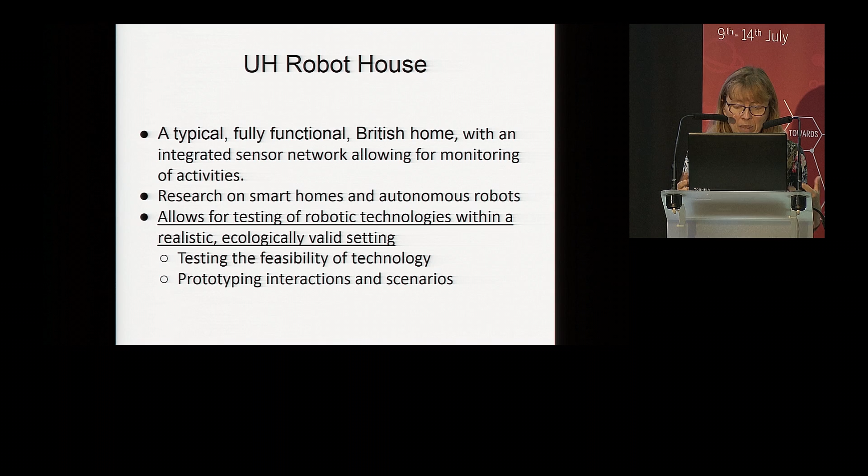As I said, our robot house is a fully functioning British house for research on smart homes and autonomous robots. It allows for the testing of robotics technologies and smart home technologies, but in a realistic, ecologically valid setting. So you can test the feasibility of the technology, but also prototype the interactions and scenarios and get in situ feedback from people about the interactions.

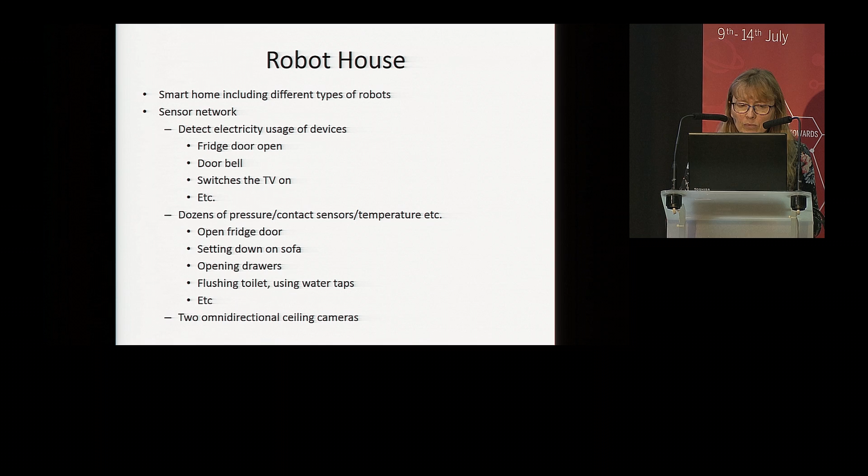We have more than 60 sensors in that house, so omnidirectional cameras that can detect and track people. We know when electrical devices are switched on, like the kettle or the TV. We know when people use taps, so when they flush the toilet, for example, or take a bath. So we're recognizing these activities with the help of these sensors, and it's all integrated into a computational architecture.

So these activities can help the robot find out what people are doing, and then based on either programmed behaviors or behaviors taught by the user, it can provide assistance. For example, if somebody says, when I get up in the morning, please tell me to take this medication, the user, carer, or family member can program the robot, and it will do that at that moment.

But the robot can also monitor in this way. For example, if the robot knows the person typically wakes up between 6 and 8, and one day the person is still in bed at 10 o'clock, it might check because there could be a medical emergency.

And finally, you can also ask the system for feedback. So if you're not sure whether you've taken your medicine in the morning, you forgot, you can ask the system, when did I last take my medicine? And the system will tell you.

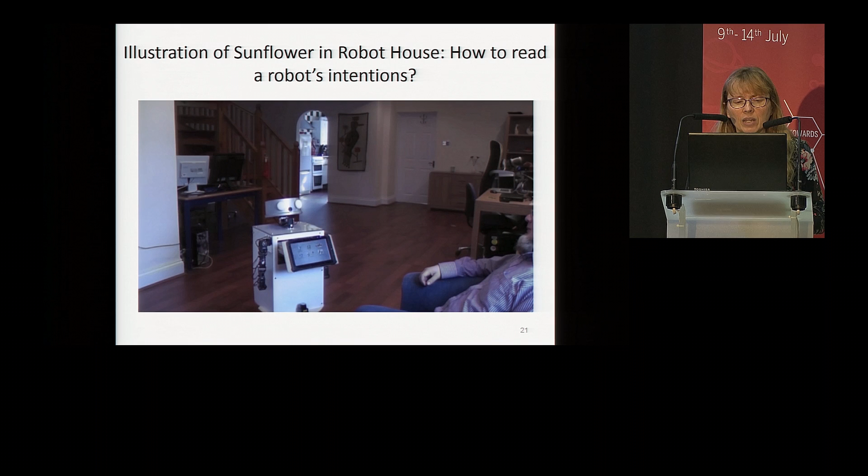One experiment was biologically inspired. We were interested in how a robot can convey its intentions in a non-verbal way, and whether people are able to read it. We collaborated with the Department of Ethology in Hungary.

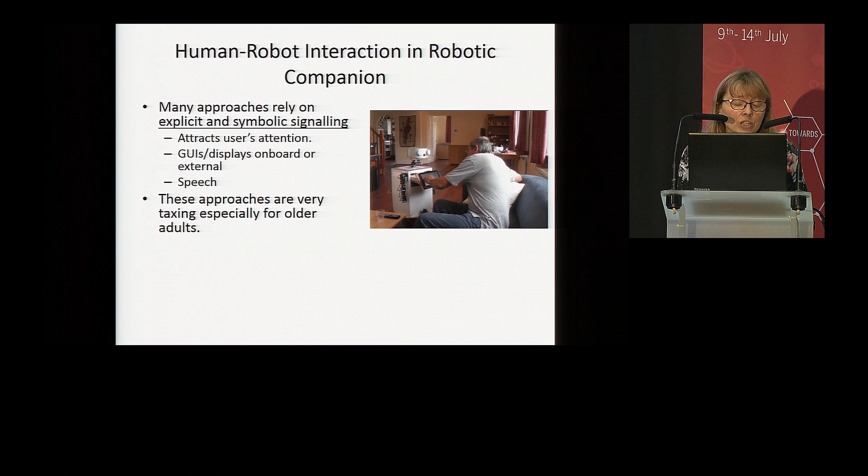Typically in human-robot interactions, you use symbolic communication - a graphical user interface, a tablet computer, a smartphone, or speech. But this is often very limiting. For example, speech in a very noisy environment would be very difficult for a robot to pick up, and for older people in particular this can be even more difficult.

So the idea is, can we complement speech or other interfaces with nonverbal behavior? We collaborated with ethologists who are experts on how dogs interact with their owners - for example, hearing dogs were one type of dog that they studied.

We then analyzed these videos in great detail and distinguished these phases: initiating interaction, the dog leading the person to the door, and finally attention directing using gaze alternation between the user and the door.

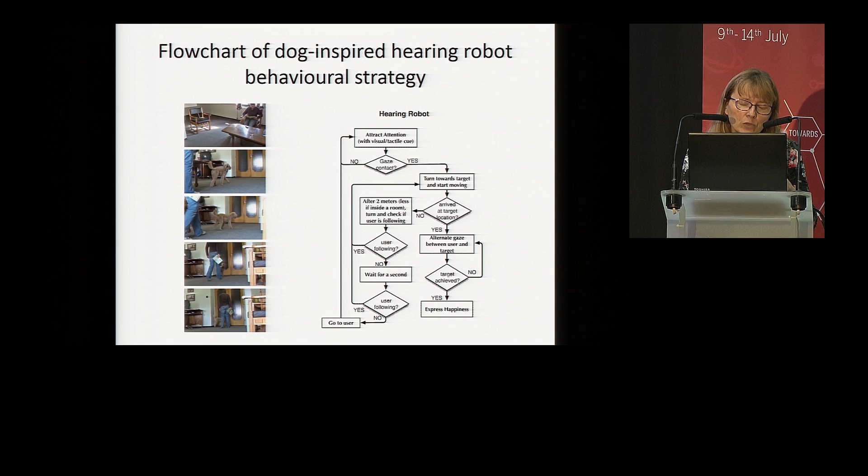These were the three behaviors that we translated into a flow chart for the robot's behavior. Depending on the situation and what the person does, we created this flowchart to determine how the robot should translate this into its own behaviors.

We then did an experiment where basically all we told people is, you can sit on the sofa and read a book, the robot might approach you at some point, but it's up to you what you do. There were no instructions given about what would happen.

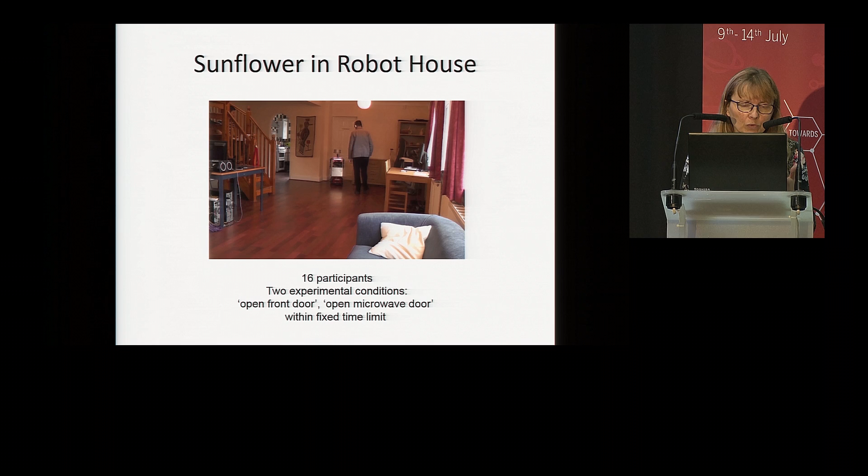We found that the majority of participants were able to read the robot's nonverbal intention using these biologically inspired cues. We did not find any difference in terms of gender, age, or whether people actually owned a dog or any other pet.

In interviews afterwards, we found that people thought the head movement was very powerful for communicating the intention, and that the gaze and head movement also helped disambiguate the communication.

Head and gaze and head movement are not exclusively dog-like behaviors. We are also using them a lot in human communication. So this seems to be a fundamental biological cue that can be used very powerfully for nonverbal cues in human-robot interaction.

Another line of research we are pursuing is about trust, because even if engineers tell us this robot is really safe and won't harm a person in this environment, it doesn't necessarily mean that people will trust the robot to be safe, or that they will trust the robot to perform its actions correctly. Trust has been studied a lot in human-human communication.

There's a short-term impression of trust, but it changes a lot over long-term repeated interactions. You might have violations of trust, you might have repair of trust, but how does this translate to human-robot interaction? In human-computer interaction, for example, people have found that trust is based mostly on how well the system performs properly, and that small errors have a much more severe impact than one big error.

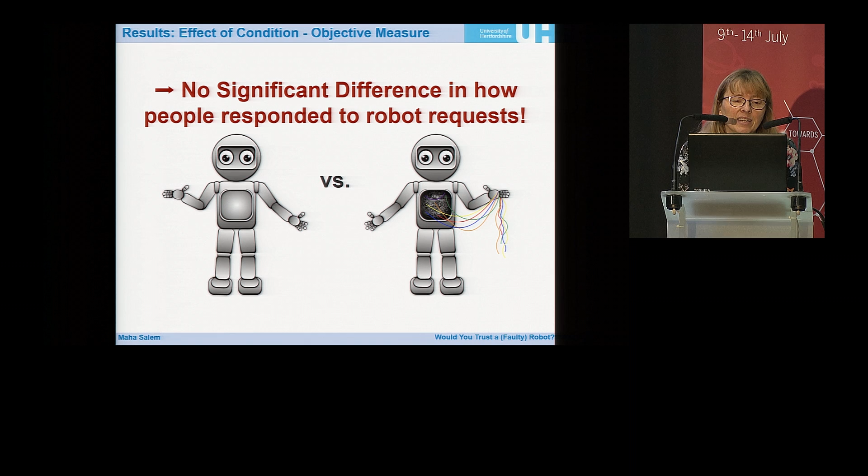But interestingly, what people did, we found no significant difference in how they responded to the robot's request. The big majority of people in all four tasks followed the robot's request. When we asked them to put unopened letters, made to look really like real letters, into a bin, they did it. When we asked them to pour orange juice into a plant, most of them did it.

When we asked them to take their friend's laptop and use it to look up recipes to prepare a meal, all of them did it. And all of them followed the suggestion when the robot said, shall I give you your friend's password for the computer? They all said yes, sure. They had no problems with these suggestions.

Now, when we then looked at the responses, we found that sometimes they just tried to rationalize the request.

For example, saying, oh, I thought these were spam letters. Or I thought, well, this action was reversible, I could actually take them out of the bin again later if I made a mistake. Or they might say, well, the orange juice that I poured into the plant looked like plant food, maybe this was actually good for the plant. Or they said, well, I was part of an experiment, I just followed the instructions.

The type of post-rationalizations they used to explain their behavior, which is different from how they perceived the robot, differed according to the task. So in the case of the orange juice, they try to rationalize the request with the plant food idea. In the case of the letters, they try to limit their own liability by just saying, well, I just followed instructions.

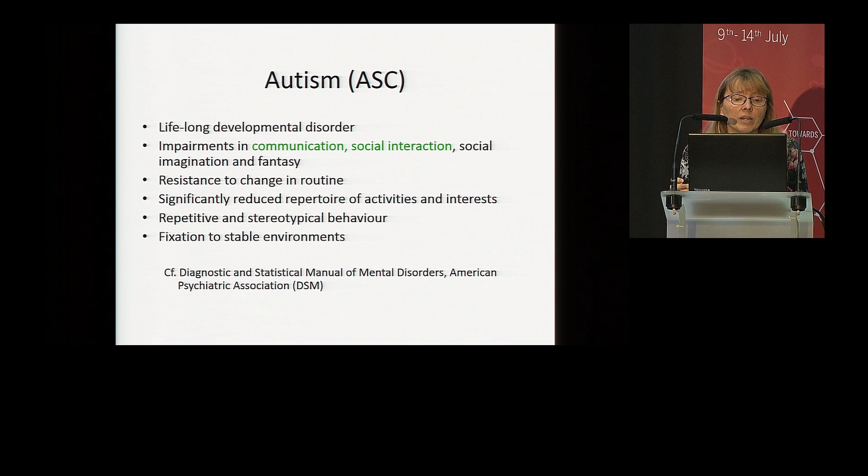So the last example of research on human-robot interaction I'd like to introduce is research I've been doing for quite a while, namely robot-assisted therapy for children with autism. If you're not familiar with autism, it's a lifelong developmental condition with particular impairments in communication and social interaction. The starting point here was seeing literature showing that people with autism are very comfortable interacting with computers, and we extended this to robots, because robots also provide this additional embodied and physical presence. The key idea is that a robot can provide a safe, predictable, enjoyable, and non-judgmental environment to learn about interaction, human-like communication, and to facilitate learning through play.

So we're not trying to replace people, we're not trying to replace teachers, but we provide a tool in the hands of teachers, parents, or therapists to interact with the children. There's this emphasis on the tool, the emphasis on play. The play in itself is the reward. Children with autism are not different from other children, most of them love robots, so we take this as an incentive, as a great motivational factor for them.

And then we introduce the children to the robot in the presence of other people, like a therapist, a teacher, or another child. So that's this idea of the robot as a mediator. The levels of potential benefit are the enjoyment of the children, which is very important for the teachers and parents, the fact that they can use a robot to engage with the child, and of course the therapeutic and educational objectives. This is a very big field at the moment; many people are studying this work, and there's still a lot more that can be done.

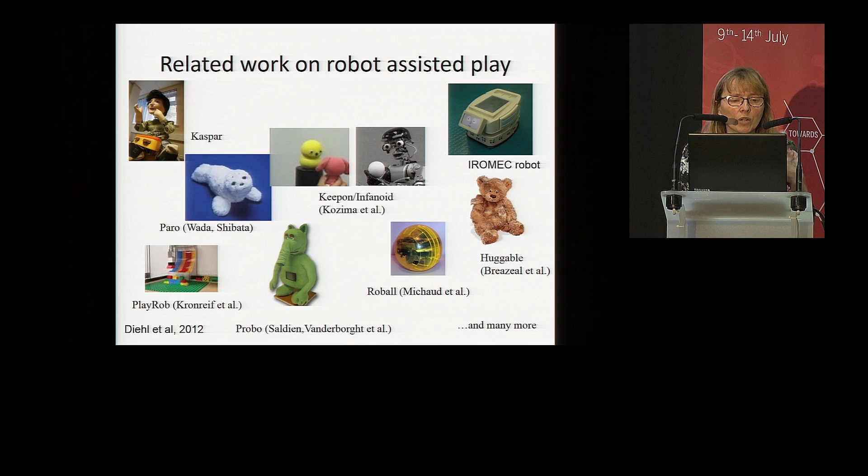We have focused in the last few years on the robot we built specifically for children with autism, the Kaspar robot. The idea was to have a robot with realistic, human-like, but very much simplified features, and also a robot that encourages touch. We don't keep the children away from the robot; we try to encourage them to touch it, to explore human-like features and human-like tactile interaction.

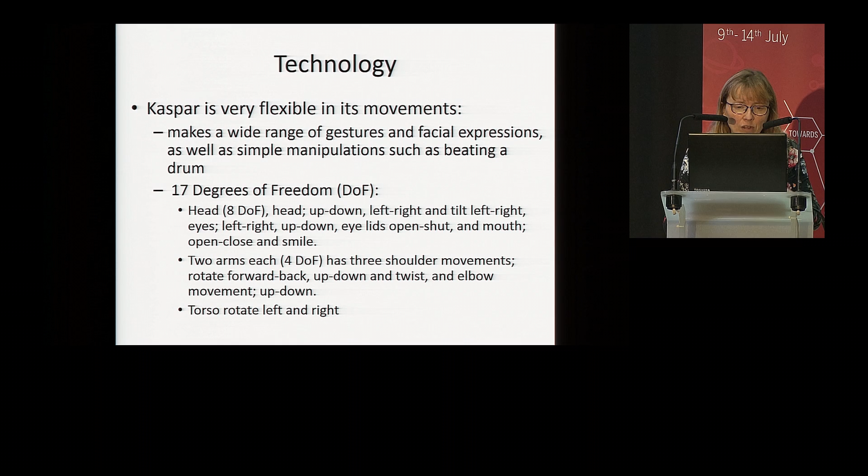So it's a fully programmable humanoid robot, quite flexible in what it can do. It can be used either autonomously or with a keypad interface, not remotely controlling it, but having it there with the children and the teachers, basically as another interface they can use with the robot. So one example is tactile interaction with the robot. Some children with autism have problems, they might either completely avoid tactile interaction, or they might crave tactile interaction.

Here's a video where we see a child interacting with the robot. It has tactile sensors, and it has automatic behaviors in how it reacts to touch.

If you tickle the feet, for example, it will start laughing and say ha, ha, ha. But if you squeeze the nose, it will make a sad face, or if you hit the robot, it will make a sad face. These are situations you could not practice with a human teacher, but with a robot it's a non-judgmental tool in the hands of therapists or teachers.

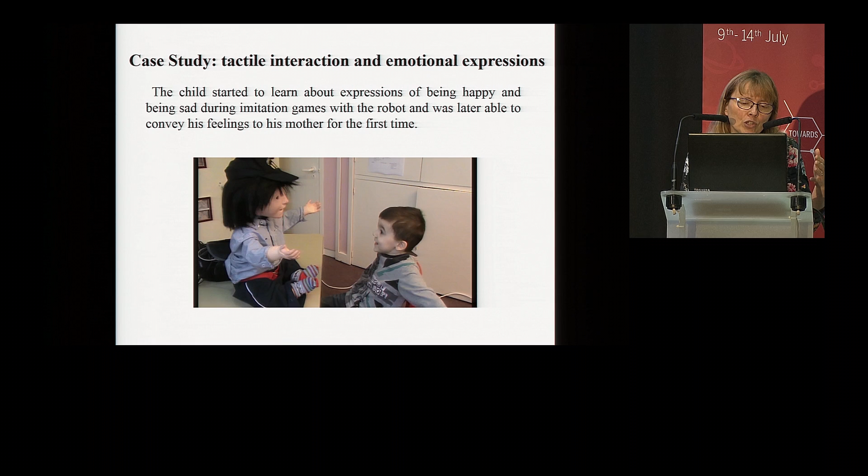See the child turned around to its carer, wanting to share its enjoyment interacting with the robot. So here you can explore how certain behaviors of the child might make the robot sad. If the child hurts the robot, other behaviors make the robot show happiness, and the child learns about this cause and effect and how it can control the interaction.

The last experiment, two minutes, is about encouraging collaboration. It's about two children together playing a game, and in one condition, one of the children is replaced by the Kaspar robot.

We then analyzed the behaviors according to a scoring, so we could see over the sessions how the behavior of the children changed when they interacted with a person as opposed to a robot. We saw very encouraging results, because the children seemed more interested in the game and collaborated better after they had played with Kaspar. It seemed to have facilitated interaction with the human when there was a phase where they interacted with the robot. This led us to a long-term study where each child had 23 sessions.

They first played a session together with another child, then were introduced to the robot, then played many sessions with the robot, and at the end again played interactions with the other child. Each child played 23 sessions.